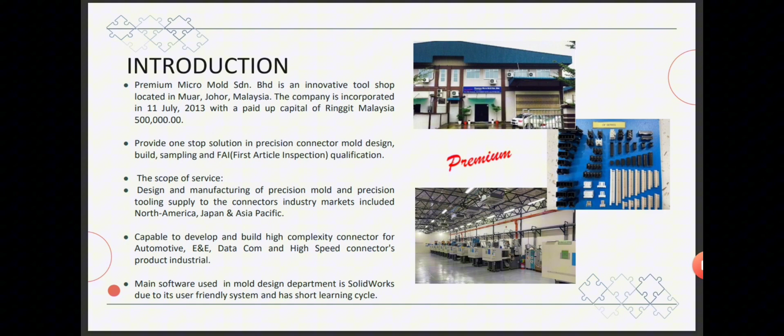The scope of service includes design and manufacturing of precision molds as well as precision tooling supply to the connector industry markets, including North America, Japan, and Asia Pacific. The company is also capable of developing and building high complexity connectors for automotive E&E, datacom, and high-speed connector product industries. The main software used in the mold design department is SolidWorks due to its user-friendly system and short learning cycle.

From the first day of internship, I had been assigned to the mold design department under a project engineer. Generally, the designer will first accept the customer request by 2D drafting that was prepared by the customer themselves. The product material varies depending on what type of resin properties the customer has selected after physical and chemical analysis that is usually done by the product designer. Here, the mold designer is responsible to design the mold that will produce a product with optimal quality.

After all the design processes were done, the latest 2D drafting produced by the mold designer will be given to the fabrication department. The fabrication department will fabricate each part and assemble them to create some samples. The sampling process was done to produce samples that will undergo FAIR, first article inspection report. During FAIR, random items will be chosen from the sample batch to be inspected whether they were produced to the exact customer requirements or not.

The manufacturer will examine the sample thoroughly in terms of its dimensions, equipment, design, and material. If the sample met the requirements, the manufacturing and production process will be qualified and mass production can be started. If the sample does not meet the requirements, such as air trapped inside the mold or an intolerable rough surface finish, the sample will be improved through conditioning or debugging before being fabricated again. If the sample taken after debugging met all the customer requirements, it will be qualified and mass-produced. Otherwise, the design will be improved until it meets requirements.

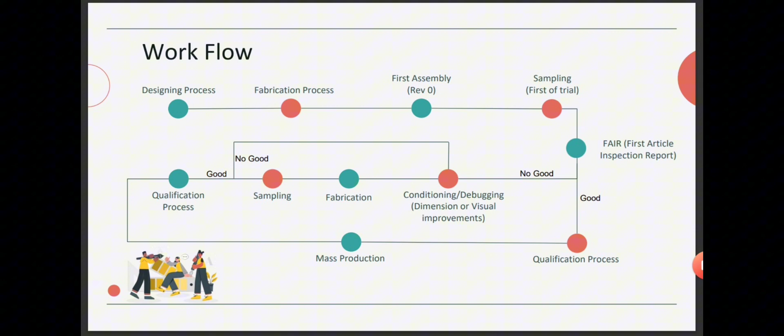As an intern, my supervisor believed it was necessary for me to undergo the whole process of building the mold and insert cavity from square one. My supervisor was aware that I had never used SolidWorks before and only used CATIA during my courses. Thus, for the first 2 weeks, he gave me a lot of SolidWorks practices with multiple levels of difficulty to prepare for the project. Since SolidWorks is similar to CATIA, I did not have a lot of difficulties completing the tasks, even though it did take some time.

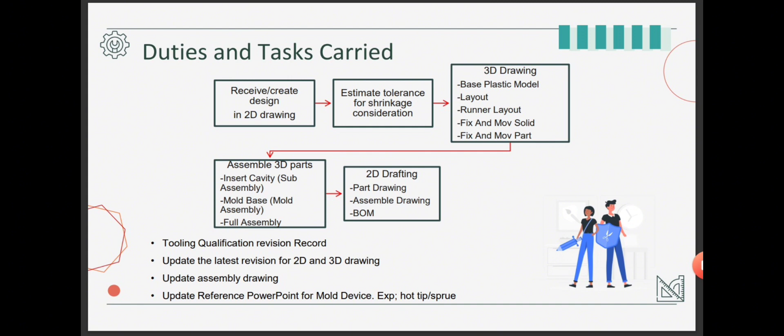In the third week, I began to handle a project called A Cap, which is a plastic mold product. After receiving the 2D drafting from my supervisor, the first thing to do is to understand the drawing and calculate the dimensions with tolerance. The tolerance was calculated based on the shrinkage percentage. Shrinkage percentage differs with the flow direction of the resin as it is injected into the cavity. As an example, shrinkage along flow is estimated at 0.3%, across flow 0.4%, while mixed flow is estimated at 0.55%.

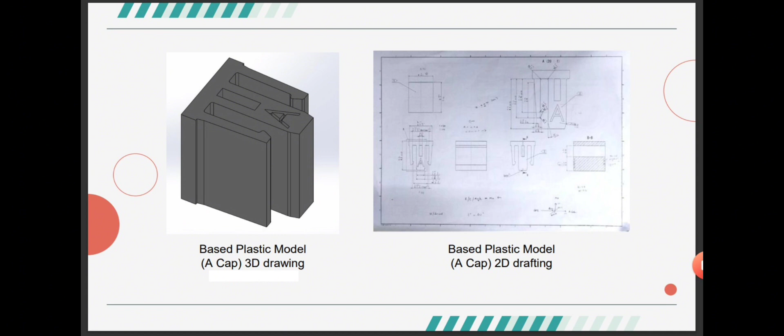The data is then tabulated in an Excel spreadsheet that has been customized to estimate the design dimension after the shrinkage is applied. The customer requirement dimension was replaced by the new design dimension. One mold consists of the mold base, cavity insert, and standard components. These three components can be differentiated by the first number in their part name. For example, mold base starts with 0, cavity insert starts with 1 and 2, standard parts start with 5, and there are also standard parts that have an alphabet name.

In the cavity plate, there is a space called the pocket. The pocket is the space left during fabrication to be filled by the cavity insert. Before creating the model, the parting line, size of the pocket, size of the mold, and product shot were decided. Based on the altered 2D drafting, the 3D drawing was carried out using SolidWorks software. The first part that needs to be built is the base plastic model, which will be referenced to draw the mold plate and mold insert. The mold insert is actually a separate mold base.

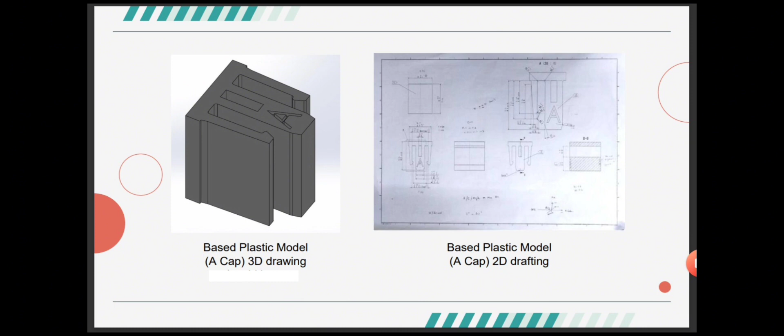The technique of drawing the mold may vary with people, but the easiest method recommended is drawing the part that will be referred to by the next part in terms of its position and axis. This method will facilitate the process of 3D full assembly. The next process after completing the mold base is to create the layout and runner layout of the mold. The mold runner consists of multiple components such as sprue, runners, and gates that work together to direct the plastic flow into the cavities. The gate that I used in this project is known as a tunnel gate.

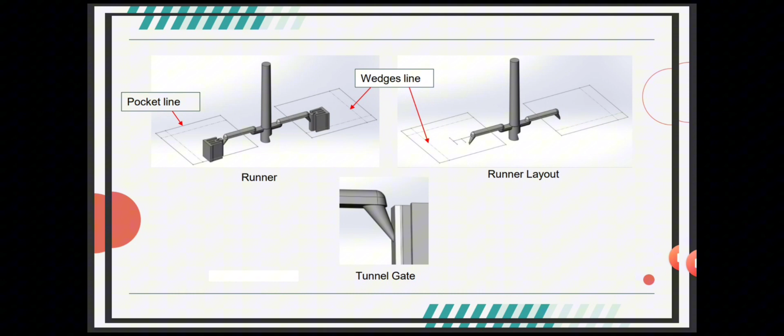There are a lot of types of gates, but the tunnel gate was chosen as the most suitable gate for this product. Tunnel gates are fabricated below the parting line so that they can be mechanically trimmed as the part is ejected. This kind of gate is frequently used in injection molding for tiny parts, high cavitation molds, or circumstances in which gates must be automatically removed.

Next step is to build the mold base. Mold base consists of multiple plates such as top plate, cavity plate, base side backing plate, spacer bar, ejector plate, and sensor cover plate. Multiple parts such as cartridge heater, guide pin, return pin, and ejector pin work together with this part to hold the mold in place. First two parts that need to be done were cavity plate.

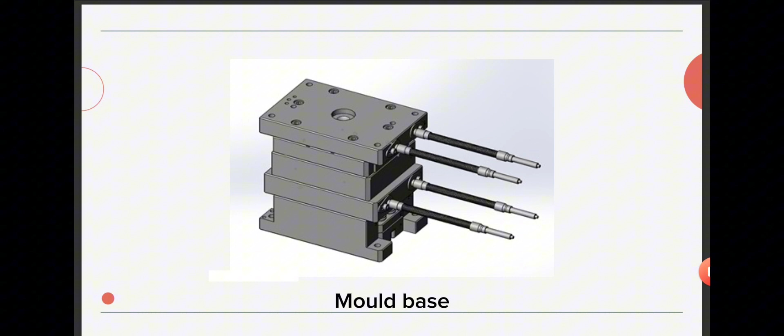Cavity plate or mold solid consists of two sides, which are fixed solid and move solid, separated by a parting line. The mold's parting line is the line where the two halves of the mold meet. Cavity plate were built based on where the plastic mold base were located. The method is to insert plastic mold base, then to draw the mold solid in its place using SolidWorks tools such as extruded boss and extruded cut.

The process of building the mold solid is a bit complicated. Thus, the supervisor provides the example of 3D mold drawing as reference. There are a lot of new tools in SolidWorks that were learned here, such as split, move face, and combine. The order of creating this part is started by arranging the fixed solid and move solid in the line, then to draw each parts in their exact position. Again, this is to facilitate the 3D assembly process.

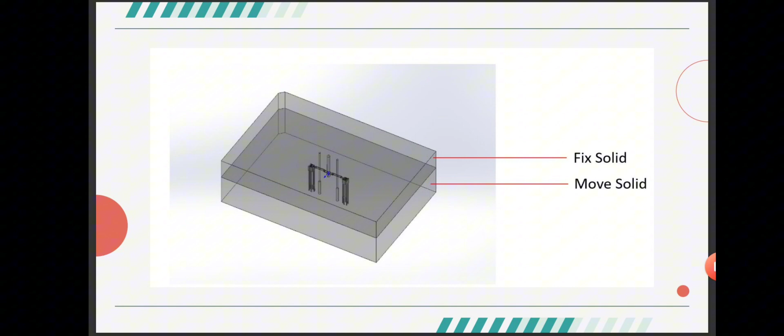After that, to build the insert cavity parts. The insert part consists of multiple parts such as fixed part, move wedges, and move gate insert. All the insert cavity parts were parts that I cut from the mold base instead of building the part from scratch to reduce human mistake in dimensions. The cutting line that were decided right from the start were done to reduce the cost when the parts wear out. Easily worn parts can be replaced by new ones without replacing the whole insert cavity.

The separated part of cavity insert were added with shoulder. Shoulder is the different height at the bottom of the part to facilitate the fabrication team to assemble the part without making any mistake.

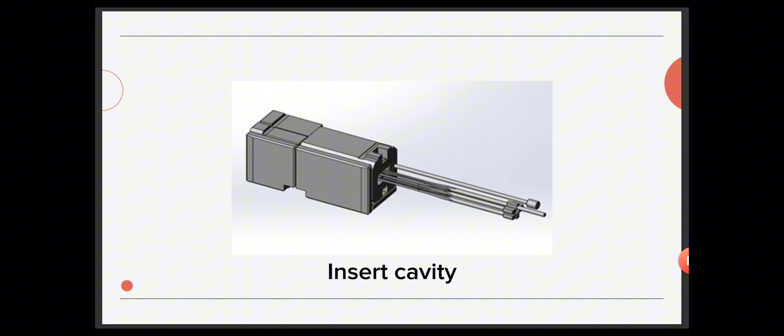Assembly process. After all the parts were done, I then assembled the parts by inserting the parts one at a time. Assembly process has 5 different stages accordingly, which are sub-fixed assembly, sub-move assembly, full sub-assembly, mold assembly, and lastly, full assembly. The assembly process were done using mate tool and interference tool. In my personal thoughts, assembly process in SolidWorks are simpler than CATIA.

Each of the assembly stages need to be inspected whether there was any interference before proceeding with the next stage. This is to ensure a smooth procedure of assembly, in which the designer does not need to go back and forth to inspect the assembly drawing, while it can reduce time consumed to finalize the assembly. While I was assembling the product, there were multiple interferences detected caused by extended parts. To overcome this issue is to go back to the part drawing and modify the drawing to fix the issue.

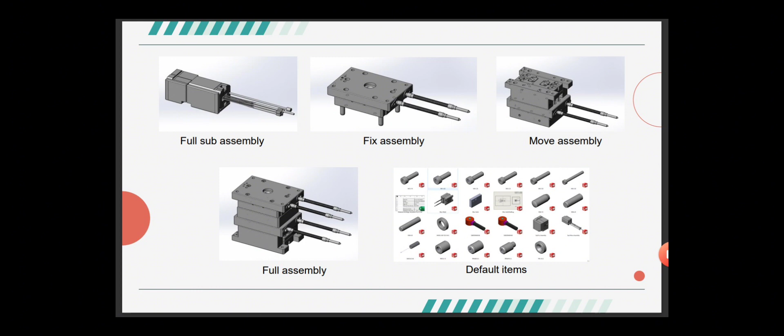After all the parts were assembled and no interference detected, the next thing to do is to insert all the standard parts that were provided by the supervisor. Afterward, the 2D drafting were carried out. For every part, the dimension labeled were followed by the tolerance. The tolerance was stated as reference for the fabrication department about the accuracy of the part dimension to ensure all the mold parts can be connected.

For assembly drafting, the full assembly drafting, which consists of 5 pages, were done only for fixed sub-assembly, move sub-assembly, and full assembly. The bill of material were added along with other information such as heat treatment, material, part name, and supplier. The section view were added too in the sub-move assembly to show the overlapping parts in the assembly. After all the drafting were done, the drafting were inspected whether all the components were dimensioned before handed to the supervisor to be elaborated.

Once in a while, I was assigned to do multiple tasks to assist the designer, such as completing the tooling qualification revision record, update the latest revision for 2D and 3D drawing, update the assembly drawing for some project, also to do the PowerPoint for mold device such as hot tip or hot sprue, to be used as reference for the workers. Recently, I did the temporary cavity plate as steel quotation for the customer.

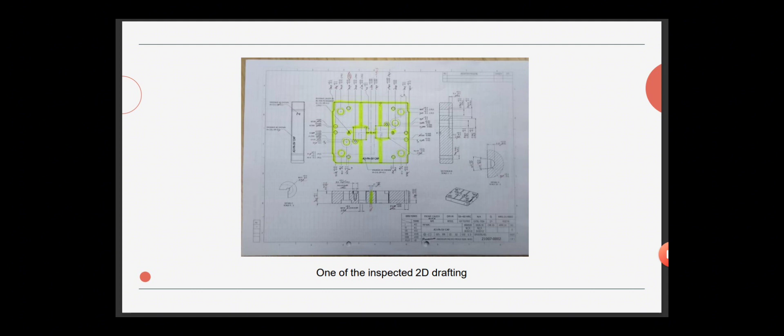In summary, I think this company is suitable for internship program as it provides a lot of knowledge about the mold manufacturing and assembly process, also exposes the intern to the real procedure and skills needed for the career. The working environment here is also healthy and helpful as all the workers are happy to answer any question they were asked. The facilities in the company are also good and clean.